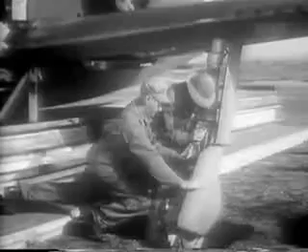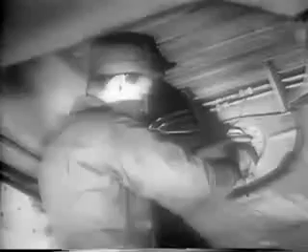With the necessary access holes now available, the uplock cables, the aileron control rods, and in the left wing, the aileron trim tab cables can be connected.

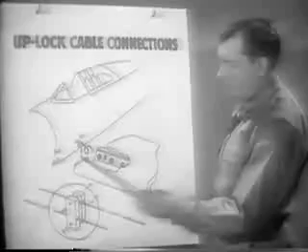Let's see what goes on inside that wing he's reaching into. To connect the uplock cables, the ends of the cables from the fuselage are drawn into the wing.

The short cable from the fuselage is connected to the long cable in the wing through this access hole. The long cable from the fuselage is connected to the short cable in the wing through this hole.

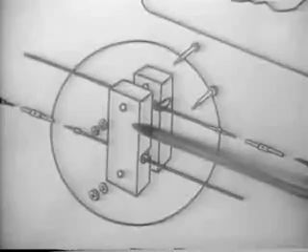These connections are made with the turnbuckles, which are drawn up to a tension of 25 to 30 pounds. On the back side of this spar is a micarta guide block, which we see here. The cables are threaded through this block.

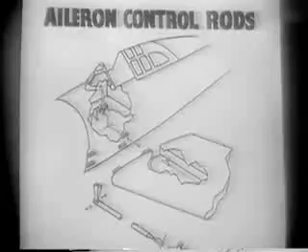Now, the aileron control rods. There's an access hole in the cockpit floor here. By reaching down through this hole, we can secure the rod with this bolt, washer, and elastic stop nut. In the wing, the same procedure is followed by reaching up through the access hole and making the bolt, washer, and nut connection.

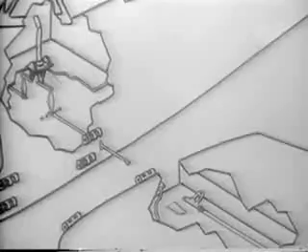Here we see a closer view of both connections: the fuselage connection and the wing connection.

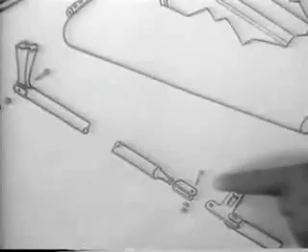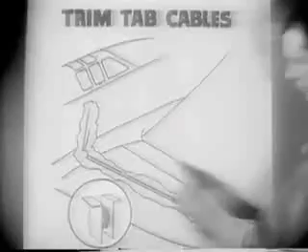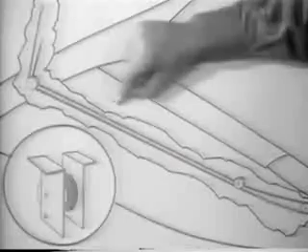The trim tab cables remain to be connected. Here is the left wing. Here are the cables running out through the wing. By reaching down through this access hole in the top of the wing, connection is made by means of a turnbuckle.

Tracer wires attached to the ends of the cables aid in pulling the cables to the points of connection. The long cable, pulled through by tracer wire, is connected to the chain by reaching up through this access hole.

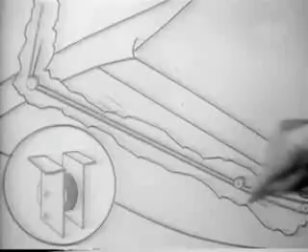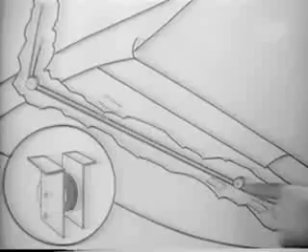At this opening, reach in and install the pulley guard with a clevis pin and cotter pin provided. Here is a closer view of the pulley guard, showing where the clevis pin is inserted.

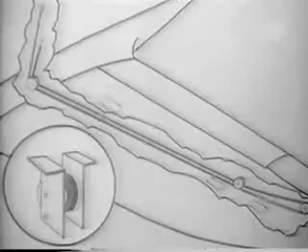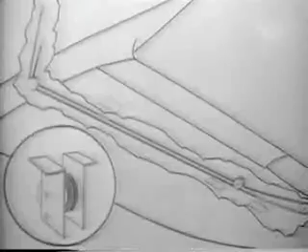A safety wire, which has been fastened around the chain, is now removed, and the cable tension is adjusted to 35 pounds. With all wing connections now complete, the next step is to make preparations for checking out the operation of the landing gear.

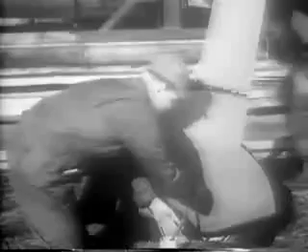First, we check the fluid in the hydraulic reservoir. Pressure is then built up in the hydraulic system by using the hand pump in the cockpit until the indicator shows 1,000 pounds. The flaps and brakes are now bled according to standard technical orders.

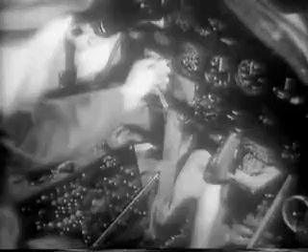90 pounds pressure is pumped into the upper chambers of the shock struts, putting the gauge on the valve to the lower chambers. Next, after making certain that all the switches in the cockpit are in the off position, the battery, which should be brought up to full charge, is installed.

Then the crew chief is ready to direct the actual testing of the landing gear, which should be raised and lowered at least 3 times.

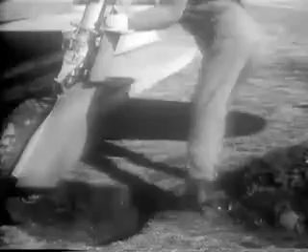In the first retraction of the gear, the crew chief should check to see that the inner door and strut fairings fit smoothly in the wing.

The next complete operation to be checked is that of the landing gear warning light. This light should remain on while the gear is being extended and should go out when and only when the gear has reached the full downlock position.

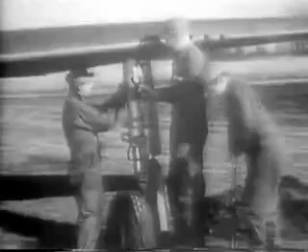The third testing of the gear is made for the purpose of checking the operation of the transfer valve. The rear inflation valve is removed, the gauge is put on the front inflation valve, a pump is attached to the gauge, and 90 pounds pressure is pumped through the gauge into the lower chamber. The gear is retracted to the point where pressure is seen to drop in the gauge.

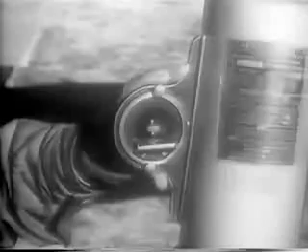Then a bevel protractor is applied to the gear. If the gear is 6 degrees from vertical, or within a minimum of 5 degrees to a maximum of 10 degrees, the transfer valve is operating correctly.

We can get ready now to roll the plane off the platform. To do that, we must transfer the weight of the plane from the platform to the landing gear. First, the air must be released from the lower chambers of the shock struts.

The landing gear must be fully compressed and held in this position while the pits are almost completely filled in and the earth packed hard under the wheels.

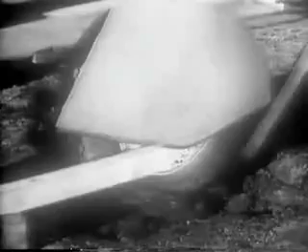Now the man in the cockpit should park the brakes.

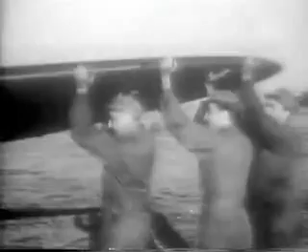The entire plane is then jacked up by pumping air into the lower chambers of the shock struts. To make the pumping job easier and to relieve strain on the pump, several men rock the plane by pushing up on the wing. The result is that the plane is lifted above the steel rest pads of the shipping brace.

Once the weight of the plane has been transferred to the landing gear, the two center skids behind the shipping case bracket are sawed through, and the front section of the fuselage platform with the supporting irons is pulled forward and clear. Now we are ready to release the tail from its shipping case brace.

In preparation for this, air is pumped into the tail wheel strut until the piston is completely extended. The man in the cockpit locks the tail wheel to prevent it from turning sideways.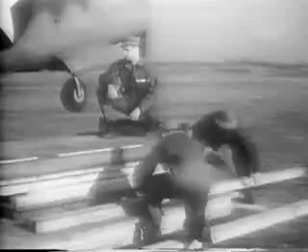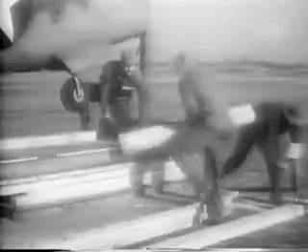We must build a track for the tail wheel to run on. To do this, we make use of one of the stringer sections formerly used to carry the wing. It is sawed into 3 equal lengths and laid directly under the tail wheel in the manner shown here.

The other stringer section is placed under the empennage jack pad. 8 men now lift the tail slightly to ease the tension on the tail shipping brace bolt. When the bolt is removed, the tail is slowly lowered until the wheel rests on the tail track.

The stringer we just used to lift the tail can now be sawed through the middle, and the 2 sections placed in front of the platform to form a tail wheel ramp.

The tow lines are made ready and fastened to the towing hole.

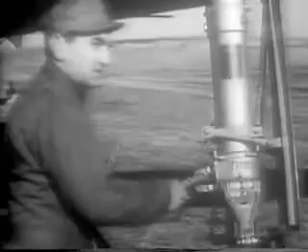Stop, not there. That's the uplock hook. Use the hole that's marked for towing.

A jeep is mighty handy in pulling the plane away from the platform, but manpower can do the job if necessary. The short sections of tail track are moved progressively as the tail wheel rolls forward.

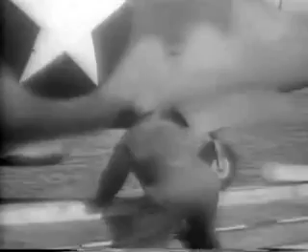During this roll-away operation, the man in the cockpit keeps a slight tension on the brakes to ensure slow, even movement of the plane. Here she comes down the ramp, looking more like a P-47 every minute.

Now is the time for pre-flight adjustments and inspections of the landing gear shock struts. First, all of the air is released from the lower chambers to allow the strut pistons to be fully bottomed.

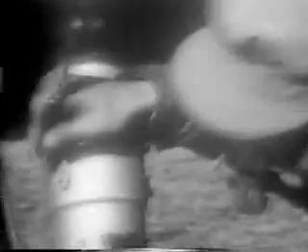Next, we remove the plug on the lower chamber to see if it contains the proper amount of fluid. If there is sufficient fluid in the cylinder, it will be found level with the plug opening.

Now the strut chambers are checked for proper pressures. 90 pounds is correct for the upper.